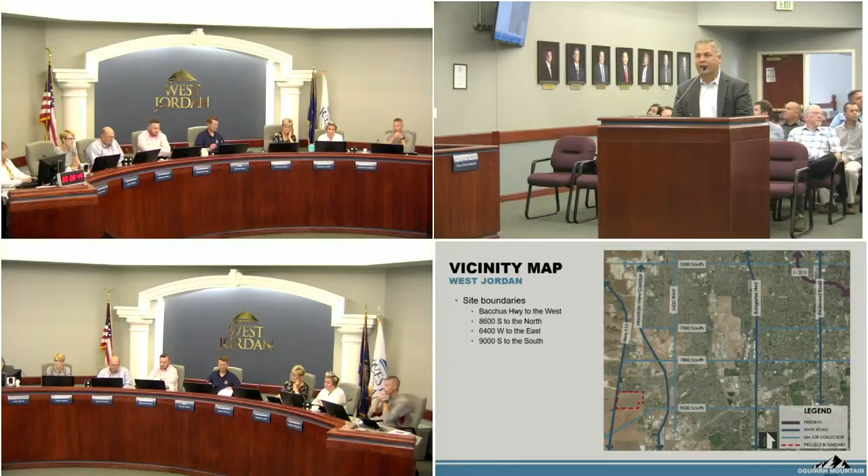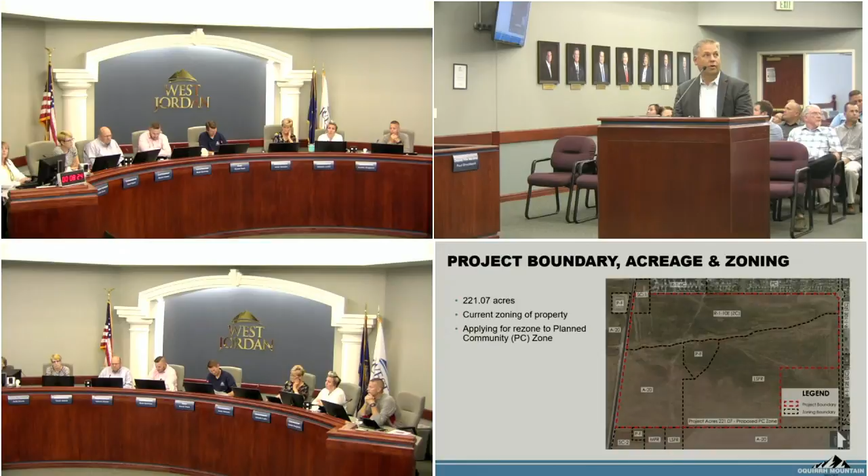As was mentioned before, the project is bounded by Highway 111 and straddles between 90th South and 86th South, just west of 64th West. The project is approximately 221.07 acres. The current zoning was A1, A20, some R1, 10E, some public facilities, and some low-density single-family residential, with a little bit of commercial ground zoned at the top northwest corner. We are asking for a planned community zone to be placed on the entire project.

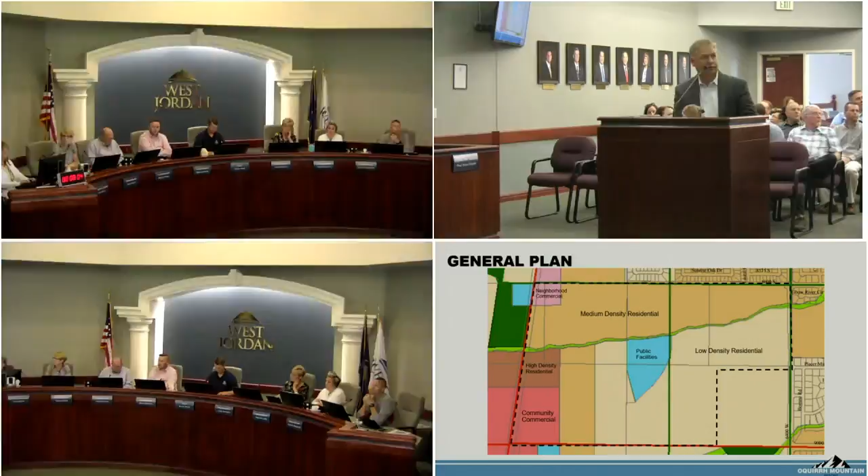This is the general plan. You can see that the general plan, is there a laser pointer here, Ray? Will they be able to see it? The general plan land use calls for some community commercial on this corner of 90th South and Highway 111, some high-density residential, some medium-density residential, a public facilities parcel here that I think was anticipated to be a school parcel, some neighborhood commercial, and then the majority would be low-density residential.

If you look at our land use, we wanted to make sure that we championed the spirit of what you wanted to do there, providing a commercial node on the corner, some pockets of very high density residential, and I'll explain what those are in a second. But the majority of the area will be a medium density blend, a blend of different size lots.

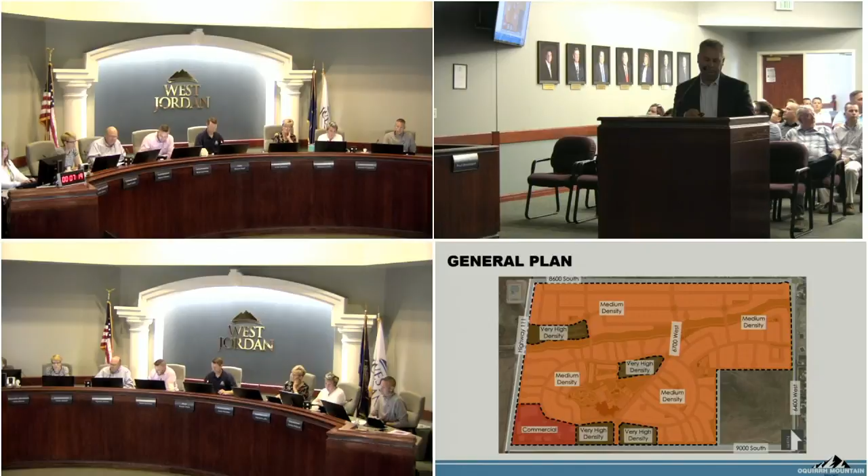We recognize that we have neighbors. We want to make sure that we're compatible and sensitive to the neighbors that have been living there for a long time. The neighborhoods to the north are a blend of 8,000 and 9,000 square foot lots. There's a piece in here that's 6,000 square foot lots, and some 5,000 square foot lots. To the east of the project, there's 10,000 square foot lots and third, quarter, and third acre lots along 64th West. Our idea was to make sure that we transition and use like for like, proposing like lots against existing development.

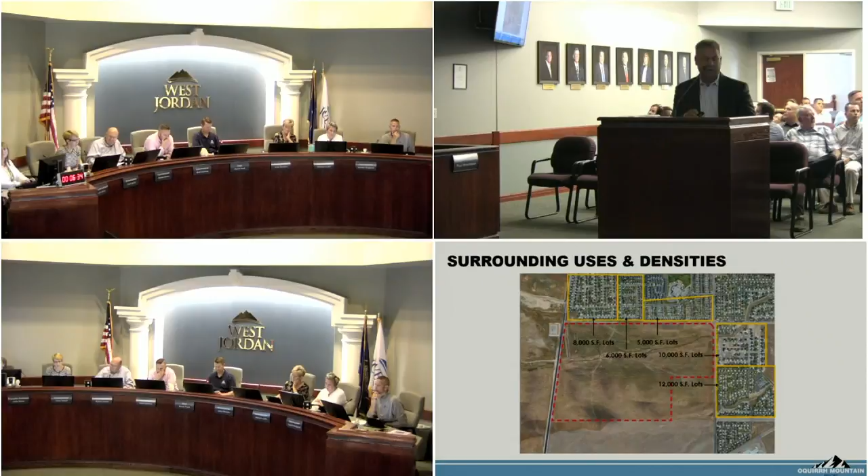The overall statistical breakdown: we're providing 30.46% of our project in open space. It's 50.35 acres. There's about 3.6 acres of 30% slope, so that slope is not counted in any of the open space. We have about 40 acres of roads.

194 acres of medium density that yields 654 units. Very high density residential is on about 17.22 acres, with 445 very high density units, and approximately 9.67 acres of commercial ground provided on the corner of Highway 111 and 90th South. We're asking for a total of 1,099 units on 221 acres, approximately 4.97 dwelling units per acre. That's our gross density.

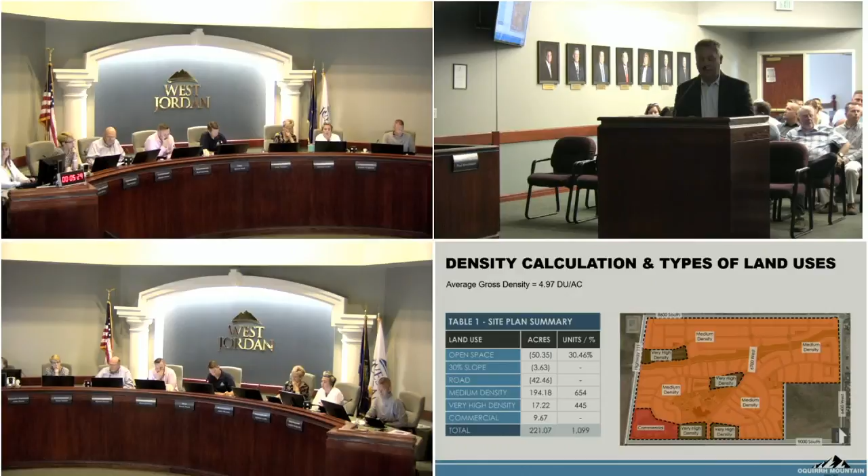I'm sure people here are concerned when we say very high density. What does that mean? This area is an active assisted living facility, so there's 85 assisted living units that are about 30 units to the acre. So it's very high density, but that's what assisted living facilities are like anyway—they're a high density development.

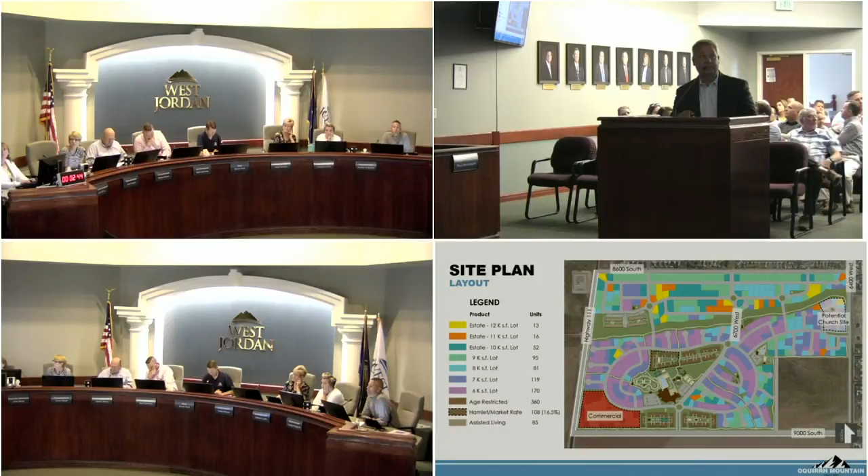Oh, one more thing—we have a potential church site right off of 64th West.

The circulation was important to make sure we're providing connectivity through the city. The city's Transportation Master Plan calls for 67th West to come through this project. We wanted to provide for that connectivity, but not creating a raceway—we want cars to get through, but not trying to set speed records from south to north. So we've implemented some roundabouts to try to calm and slow down the traffic. This will be a major collector, complying with your city standards of a 70-foot right-of-way section.

The vast majority of our streets in this project are a 50-foot street section, complying with your local street profile. We're not proposing anything different than what the city standards are. You can see there's a lot of cul-de-sacs. We have a loop road that holds the majority of the project together and encircles this major amenity, and then a series of cul-de-sacs that splay off.

We've also provided other ways to connect to a street that would abut the west side of the school property—this is a 30-acre school property. This street would also come out from the inner loop and connect back into 6400 West. We jump Barney's Wash in 3 locations, with 2 more roundabouts in this location, then tie back into 86 South.

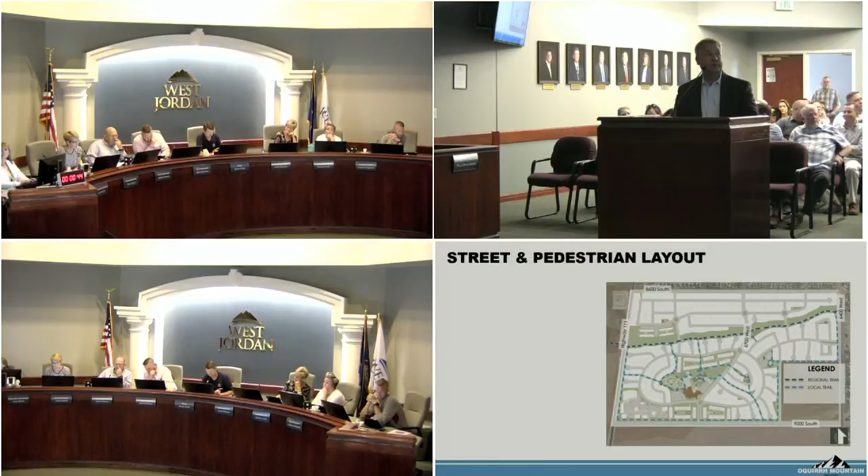Very extensive trails network that are off-street, and these trails would comply with the standards the city's established for trail corridors.

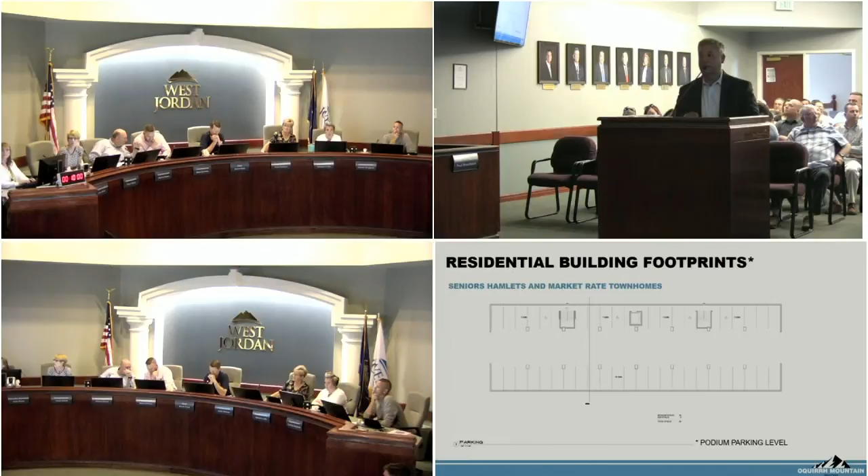So this is a schematic. This is the bottom level, this is the podium level. All of the units will be parked underneath. We'll have guest parking on the surface, but the residents themselves, because it's an age-targeted, age-restricted unit, will be able to access stair turrets in these locations, and it will be elevator fed. This is the upper level—just one level shown, but the 3 levels will be the same.

You can see here, and I know this graphic is difficult to read, but there are 3-bedroom units on the corners, and these interior units are 2-bedroom units.

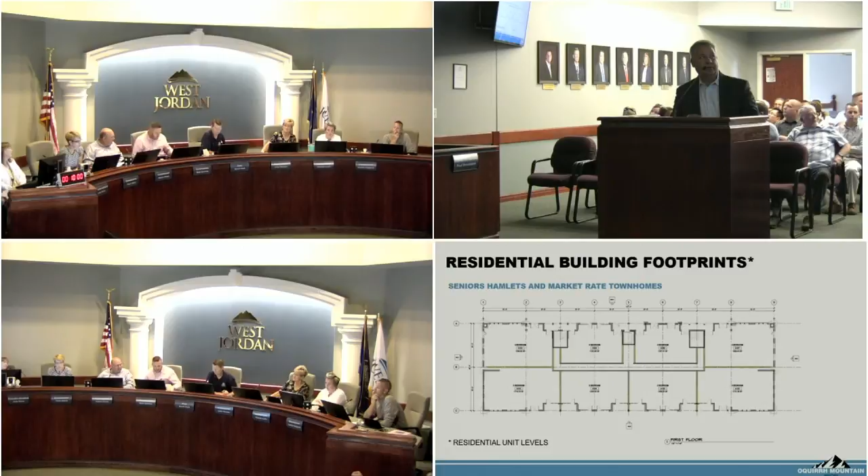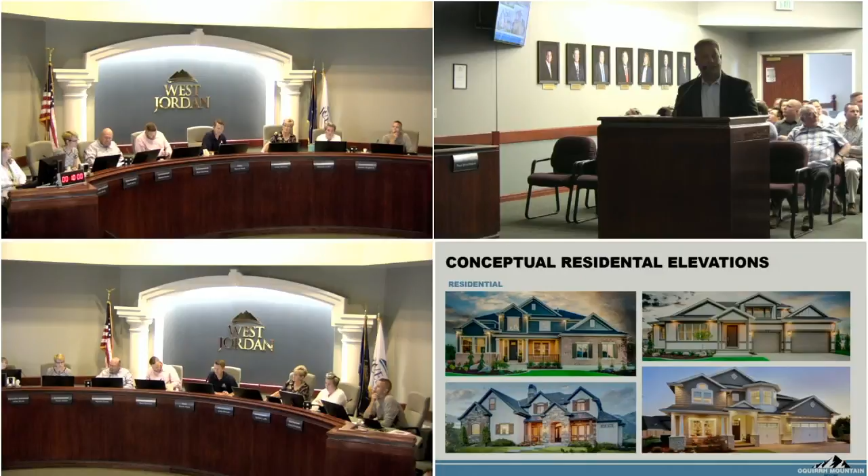Just some conceptual ideas of what the larger lots would look like. These are products that would fit on 8,000, 10,000, 12,000 square foot lots, so they'd be nice homes. These are some ideas of the architecture we are looking for on the smaller lots, between 6,000 and 8,000 square feet.

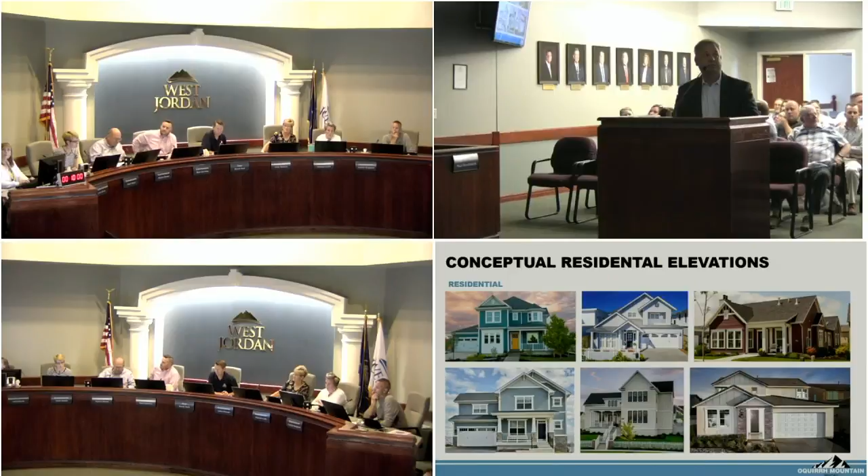Just an overview of the open space. To be quite candid with you, I've never worked with a client like this before. Usually as a planner I'm telling the client, you know, you've got to put in some open space, you really should include some amenities. This client is different. The first thing out of their mouth was: we want this to be a world-class, luxury, highly amenitized community. And I thought, okay, I started to try to test them.

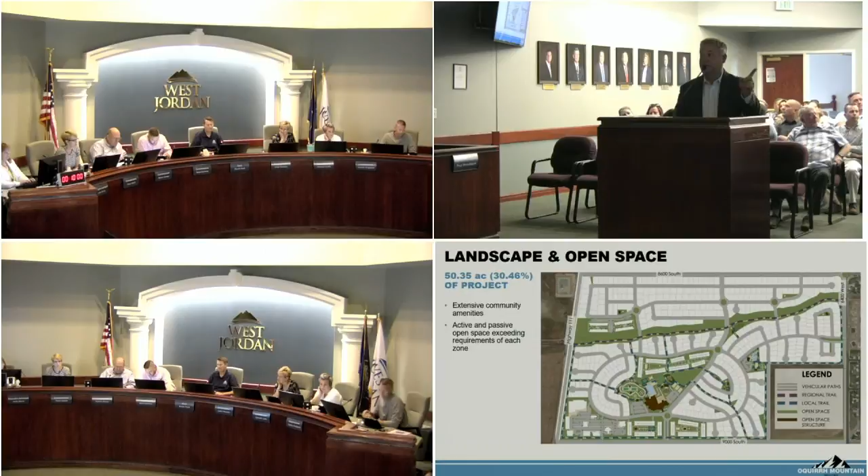So what do you mean by that? What do you want us to put in that? And I gave them a list of kind of the hot things that master plan communities are incorporating these days. And their initial response was, that's great, but we can do better than that. And they just kept adding and adding and adding. You'll see here, they're putting their money where their mouth is.

So, a very extensive trail system, a very extensive open space network. This is a list of the open space amenities: an amphitheater, arts and crafts rooms, basketball court, three bocce courts, a large clubhouse with 2 offices, a conservatory. I'm not going to go through the entire list, you have that in your document. But all of these elements find their place in this community.

Which will be maintained, installed, and managed by the HOA. The client has already contracted with the sports mall to operate the clubhouse, and it would be open to the public for a fee. They could buy a membership. When you purchase your home, you get a membership into the club.

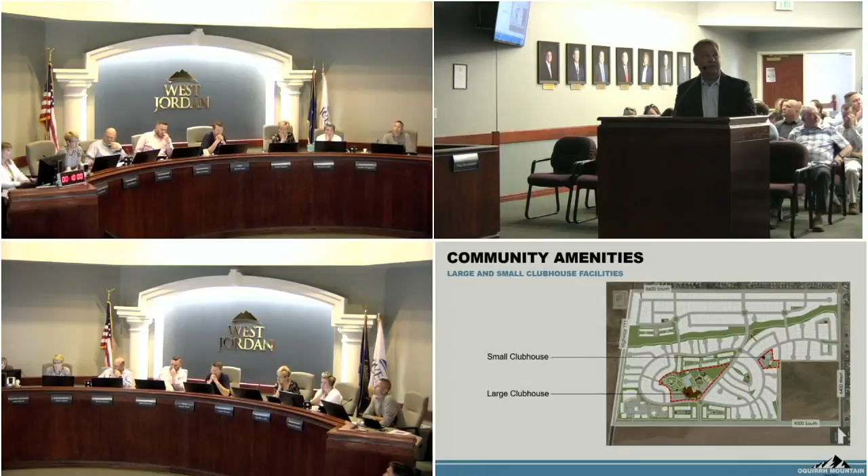So I'm just going to walk you through. There's a large clubhouse and a small clubhouse, and this is just some of the amenities around each facility. The large clubhouse is over 10,000 square feet, has an indoor and an outdoor pool. There's pickleball courts, basketball courts, and a tennis court complex here in the corner.

We've surrounded the tennis court with what they're calling an ice ribbon. I don't know if you've been out to Herriman Towne Center, they have an ice ribbon—we will have one in this project as well. There's an amphitheater, pavilions, putting greens, hammock grottos, an open play area, and parking for 200 cars.

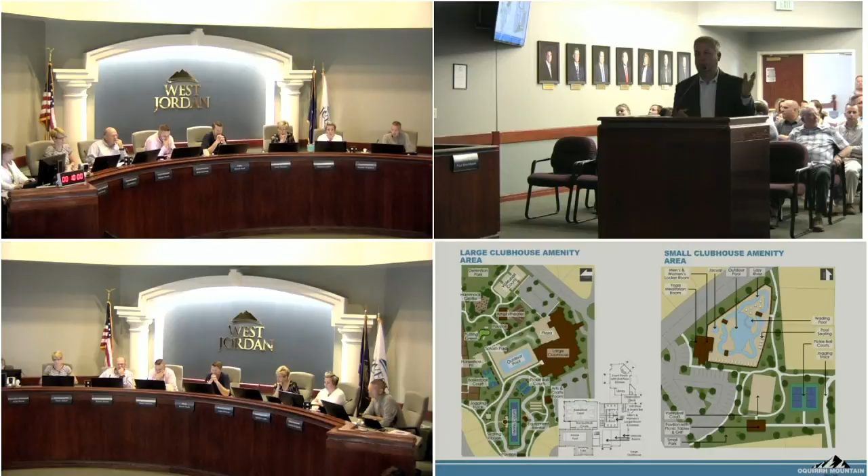This smaller clubhouse has a pool with a lazy river around it, a couple of pickleball courts, an arts and crafts building, sand volleyball courts, and small park open spaces.

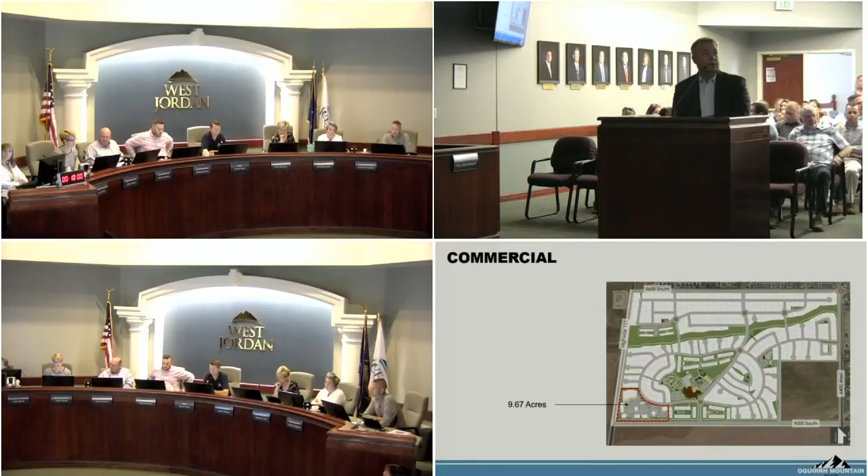Commercial—we have 9.67 acres of commercial in the corner. This is a schematic layout; nothing's been planned or set in stone. We will be working with tenants to see what their size and spatial needs are, but again, just some flavor of what the massing of this retail development might look like. It's not insignificant—it's a kind of critical part of the community.

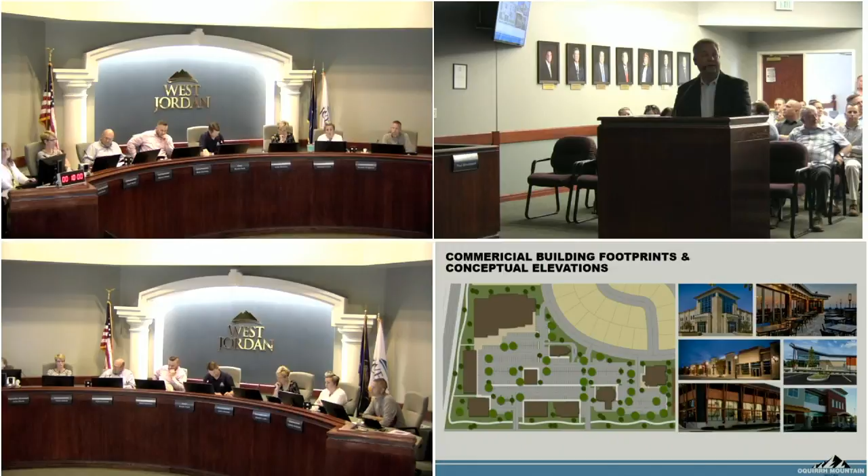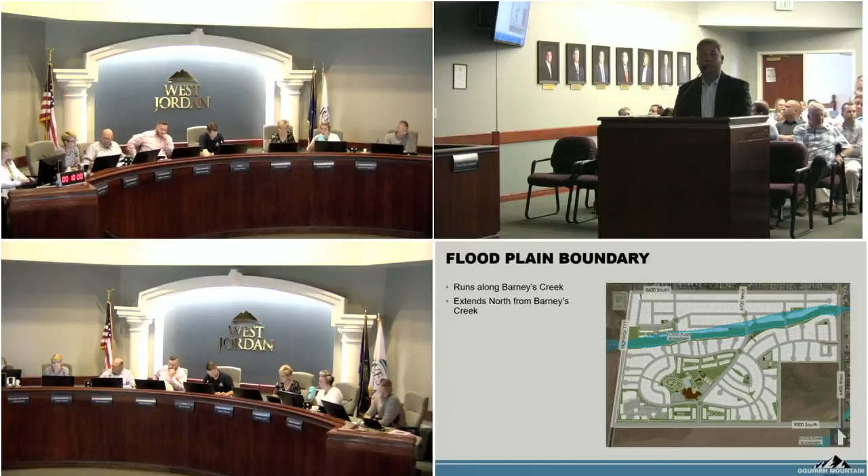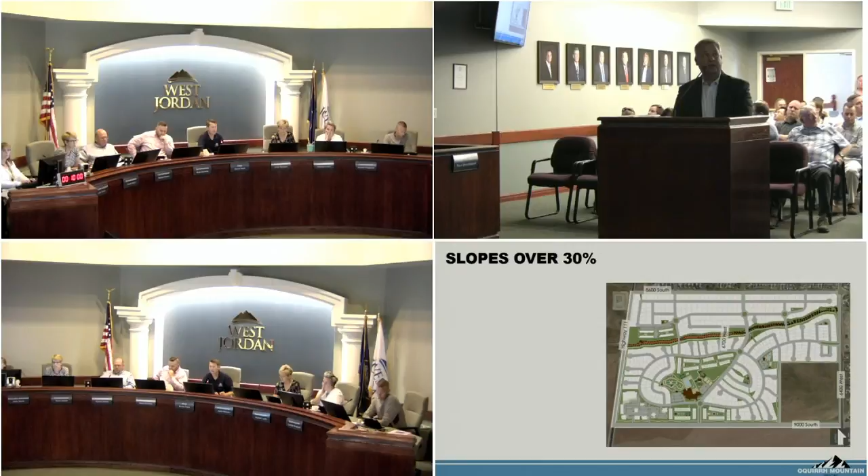We've taken into account the Barney's Creek floodplain. We're in the process of working through a LOMR with FEMA to remove that, to make that map adjustment. We wouldn't be able to build any of those houses impacted by that until that's signed off. All of the 30% slopes are associated with Barney's Creek. We won't be developing any of those. We'll be leaving those alone.

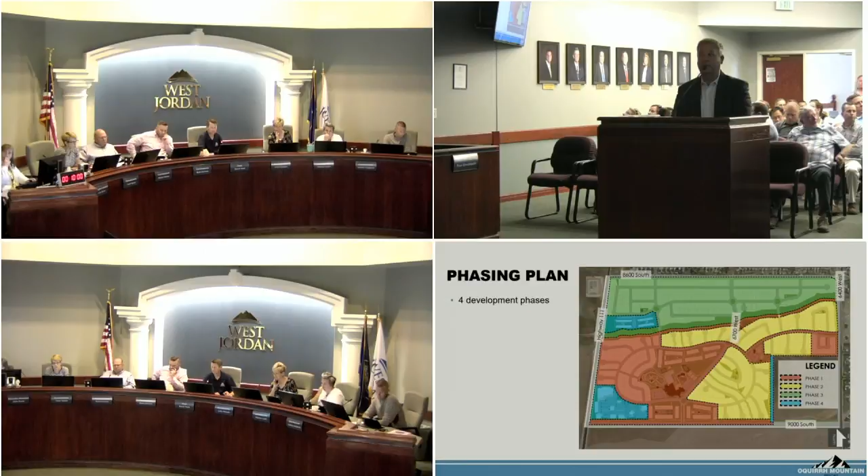That's just an initial, conceptual phasing plan. We anticipate there'll be 4 phases, and the vast majority of the amenities will come up front in the first phase.

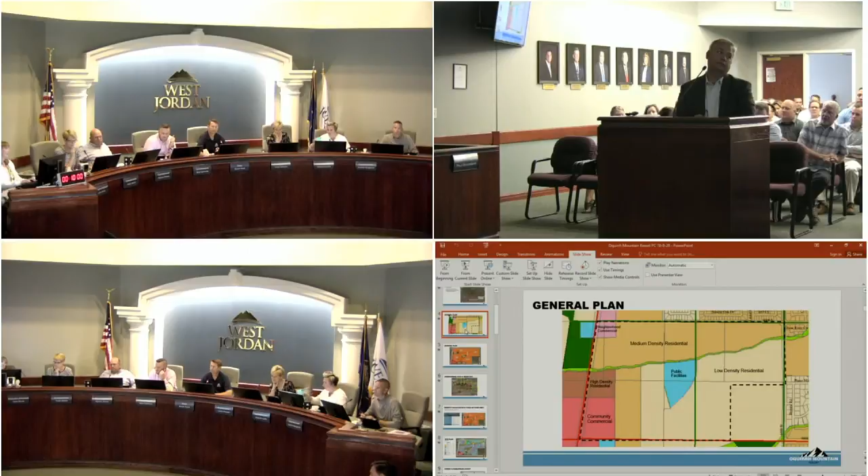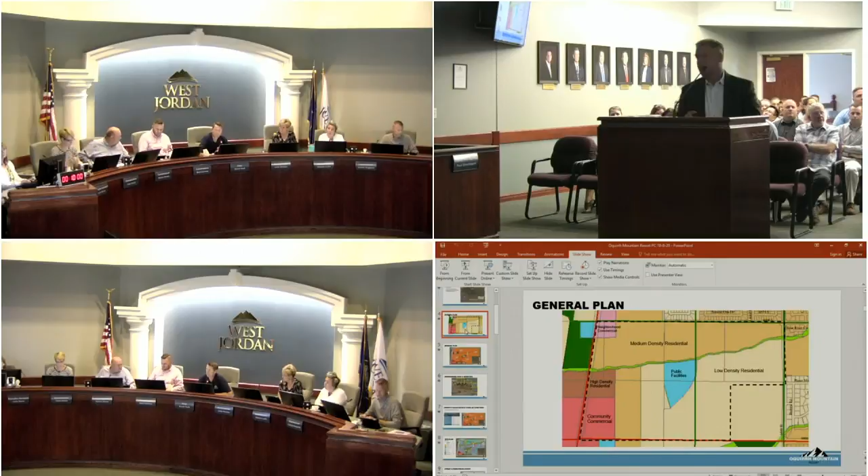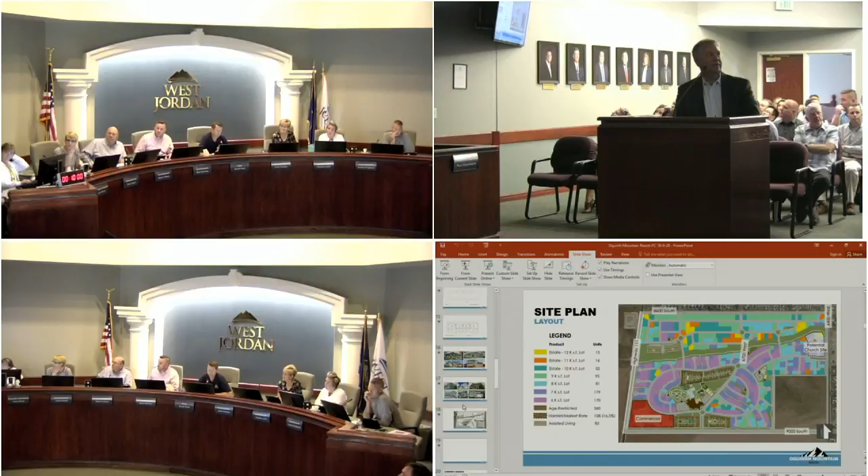So, Mr. House, just to clarify, which portion of the development is going to be age 55 and older? Can you go down, Ray? It's actually lower, Ray, it's like slide number 20. No, right above there. Sorry, slide 13, 12.

So this is the assisted living facility. This is age restricted, age restricted, age restricted. This is your market rate townhomes, right near the facility.

Great, thank you. You mentioned the amenities would be established in the first phase. What about the commercial? The commercial is in a separate phase with the assisted living facility. We're not proposing that it comes in the last phase. It's broken out separately, so if the commercial comes in immediately, we're all for it. But that's something that needs to be dictated by the market.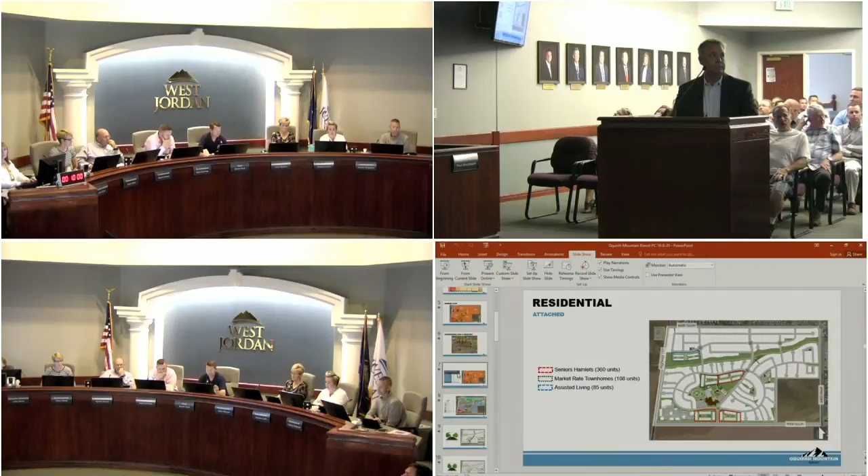Great, I think the slide would be somewhere at number 7. That shows the commercial. The only reason I mentioned it is I know we had concerns in the past of commercial ultimately falling by the wayside after the residential areas have been built out. Okay, thank you, appreciate the clarification.

Commissioner Quinn? Thank you. Two questions. First one, and I know this is really hard to predict because obviously it's market driven, but any idea what you're looking at in this commercial space? Are we looking at some kind of a grocery store or office buildings? What are we looking at?

What we've planned initially is about a 45,000 square foot box. Could be a small grocery store, and then some ancillary pads, some drive-throughs, could be bank pads, and there actually could be an office component to it as well. But again, this is so preliminary, I don't know.

But we've accommodated, using your parking ratios, for a large 50,000 square foot box, and then some ancillary buildings.

Next question, and this kind of piggybacks a little bit off what Commissioner Green said, but keeping with the spirit, in that northwest corner, currently it's zoned neighborhood commercial. I was pulling up Google Maps, looking at that area, and there's nothing there, not even gas stations. I'm just trying to figure out, is it the highest and best use to completely eliminate even that tiny little segment where we leave a gas station?

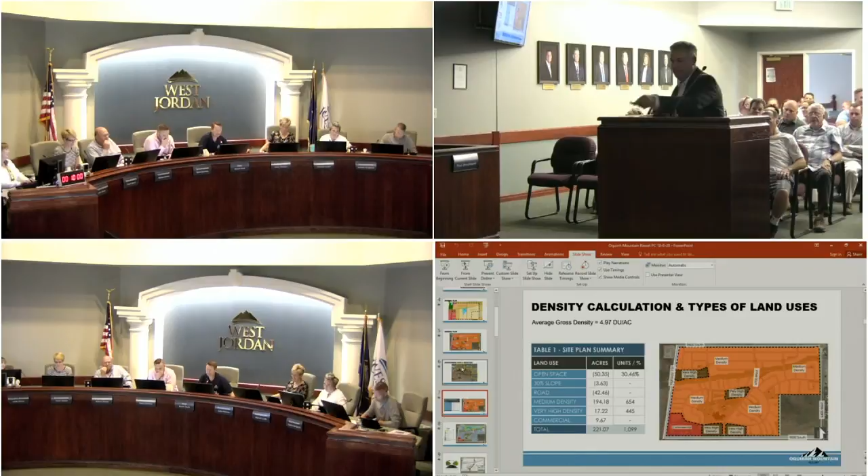Thank you. We'll reserve some time for you after the public comment section if there's anything you'd like to address. Thank you, appreciate your presentation.

Mr. McCandless, you have this item from the city. Yes, thank you, members of the planning commission, Mr. Chairman. I think Mr. Haas has done a good job of going over a lot of what I was going to talk about as part of the presentation.

We really like the open space amenities. We like how the phasing plan includes a lot of the recreational amenities up front, which has been a concern with the planning commission in the past. There are a lot of cul-de-sacs, but if you notice, they're tucked up close to where the pedestrian connections are located, close to sidewalks along Market Street. This allows pedestrians to get through to those recreational areas.

It's well thought through. We like the architecture of the buildings, the fact that parking is in more narrow units. We also like the attention given to the adjoining existing land uses surrounding this property, and how that integrates with those tenants.

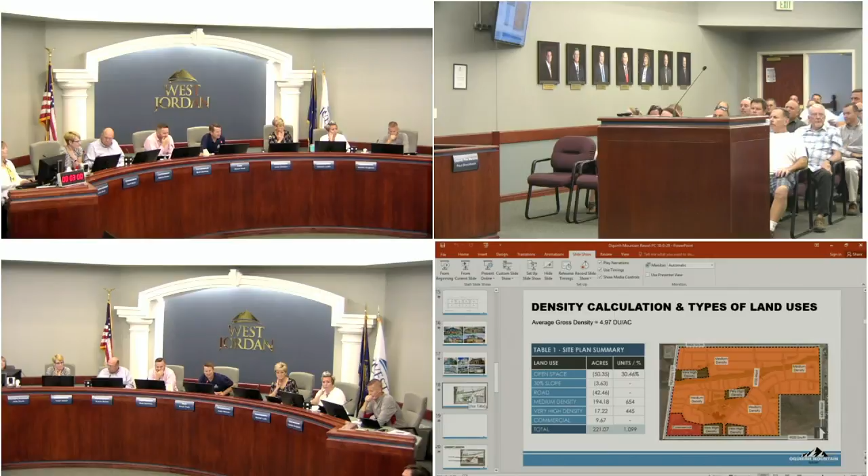My concern is connectivity to the north and into the community, the walkways. That's the basis on the south. This is just moving up the street itself, privately held, without connections through to that - there's actually a couple, one off to the left-hand side right here, then the streets here, so those are seven connection points, so that those living on the north end can get to the two facilities.

The amenities, the trails, if they wish to walk - which would you prefer? Are they just walking city streets, or is there no trail activity? Just the standard sidewalks. Okay, alright, thank you.

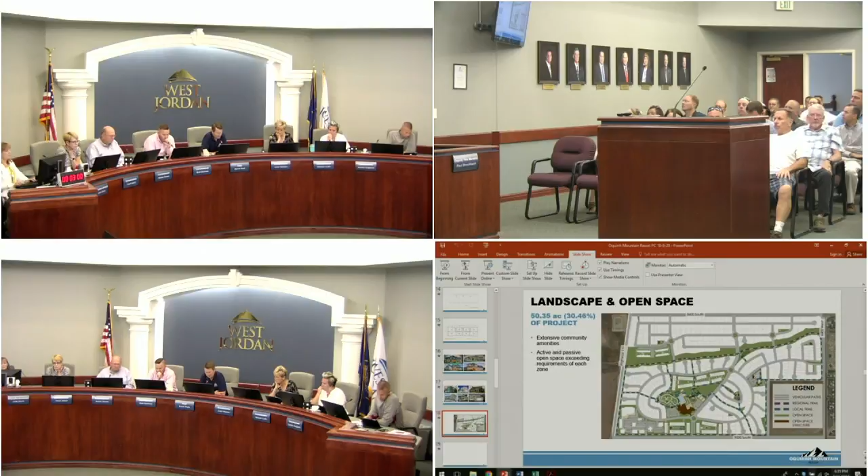Any other questions for staff? Seeing none, we'll move into the public hearing section of this meeting.

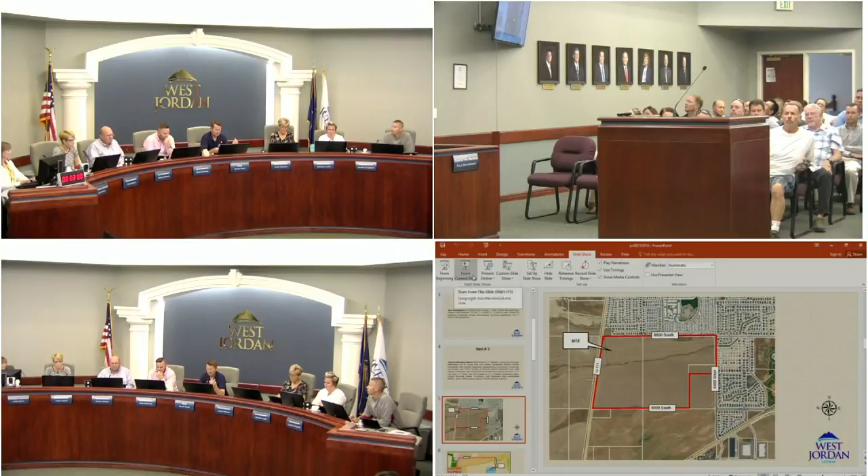One of the things that I really enjoy about serving on planning commission is always having unique perspectives up here, and being able to mention some things that the other commissioners might not otherwise think of. In a similar fashion, we recognize that citizens have unique points of view, and we want to understand your perspectives. So we want you to feel welcome to come up and speak. You'll have up to 3 minutes each. And if we could please ask, to ensure we can focus on the issues at hand but not necessarily belabor the point, please feel welcome to speak. However, if you are just reiterating what someone prior to...

Correct. So when I sit on my back deck, I'm looking out over that open field area right there, so you know where I live. Two concerns that I have: one is the traffic in that area. I've lived there for 9 years now, and over those 9 years the traffic has grown exponentially, and I see this as really exacerbating that situation quite a bit.

I would think that expanding 111 to 4 lanes all the way down to the 201 would be very important to ensure good traffic flow. Ever since they put that new Smith's out there at 78th and 56th, people from Magna and even Tooele County routinely come in on 111 to shop at that Smith's, and it's really adding a lot of congestion to the area.

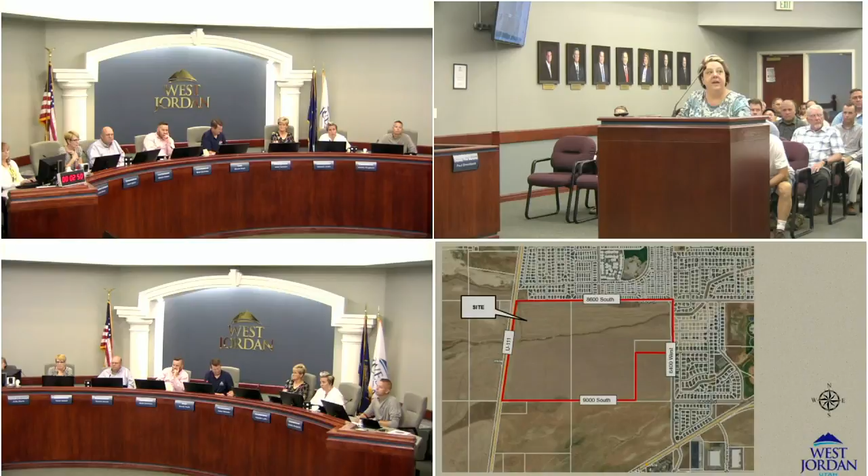Okay, my name's Valerie Pedigo. I live at 6327 West, 8755 South, straight out there at the top, about the middle is where I live. I also did my research when I elected to build a home there at Three Forks, and it is low density, and that is one of the reasons we elected to buy there.

I'm okay with this. I wasn't naive, and I don't think any of us were naive that this wasn't going to be developed. We get that, but taking it from low density to medium density, and it's the very minimum, or very close to the very minimum size lot to qualify as medium density. Putting some numbers to that today, the Olympia Hills fiasco was like 1,000 acres and 30,000 residents, which came down to about 30 to 33 residents per acre. This dials down to 23 residents per acre.

Based on that, Salt Lake County uses a 3.5 average, so that's where I got that number. But it's very close, and it's unacceptable, I think, to us.

The other thing, same as everybody else, the roadways are inadequate. It's already trafficy, you avoid 78 South and 5600 West. The schools all feed into Copper Hills, and that's already overcrowded.

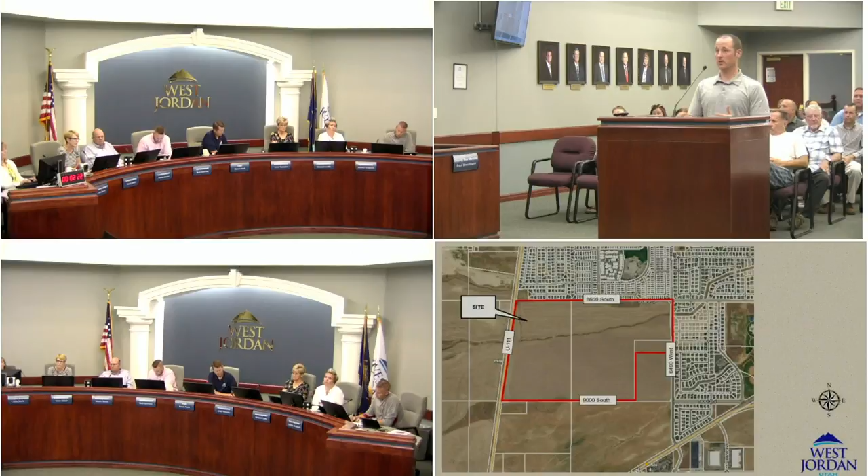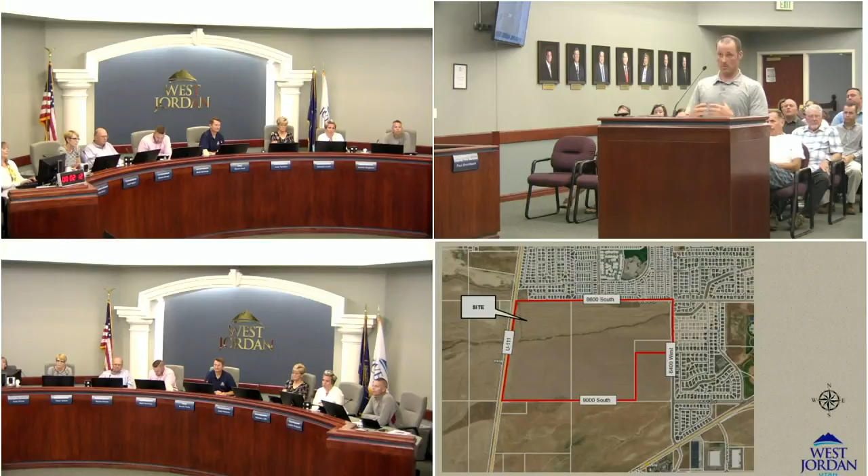Both my wife and I are concerned for the schooling needs of what the proposed plan is and the population it will bring in. Also, my understanding is that our taxes are about to go up 18% in West Jordan to fund more police, so I wouldn't be opposed to having maybe another hub of the West Jordan Police Department out in this area. I do understand and have heard other residents with issues on response time in this area. So something to consider. I don't know if it's also to consider what West Jordan can legally do to maybe have some money set aside with the individuals trying to build out here to help with building schools instead of it only being the burden of your residents and our taxes.

And that's all that I had. Anyone else this evening?

Hello, my name is Melissa Hiller. I live at 6208 Black Goose Circle.

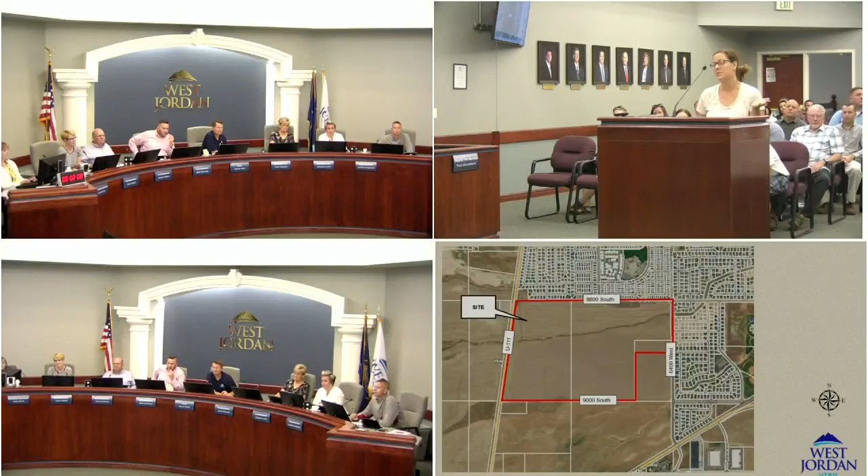Some of the other people have already talked a little bit about commercial. My concern right now as a citizen, someone that lives out there today, I find myself shopping outside of West Jordan more often than not. It's a lot easier for me to just jump on Mountain View and head down to Herriman or Riverton than it is to even get to Jordan Landing, because going anywhere east and west is just a lot harder these days than going south. So when we say there's 9 acres in this development of commercial, and that it's within walking distance for these residents, that's not a lot to walk to. There just isn't anything I would want to walk to as someone that lives there now. I just don't think the commercial is enough. It's just not enough for that area.

And I understand it's going to be developed. I appreciate you guys trying to keep it low density. I think that's where everyone's ideas are at.

The other thing I wanted to mention on that plan is, I don't know if the city still has anything in place, but I see lots of roundabouts in that plan. Please, no more. If you live out there, we're starting to turn into Daybreak. At first when I moved out there, I thought these roundabouts were so awesome, until I drove them every day. Now I think they're awful because nobody knows how to drive in a roundabout. So please don't add more in there. It's already hard enough. Thank you.

Anyone else? Come on down. Going once, going twice. We'll close the public comment section. We appreciate all of those comments. Thank you for the opinions. Thank you for your feedback. Living out in that area, we appreciate your concern.

I think it might be best if we go to the staff first before we have the applicant come back up, and let's make sure we address these items. Why don't we take them one by one here, with the most prolific one seeming to be the traffic impact, perhaps any future expansion plans for U111. Before you go to the staff.

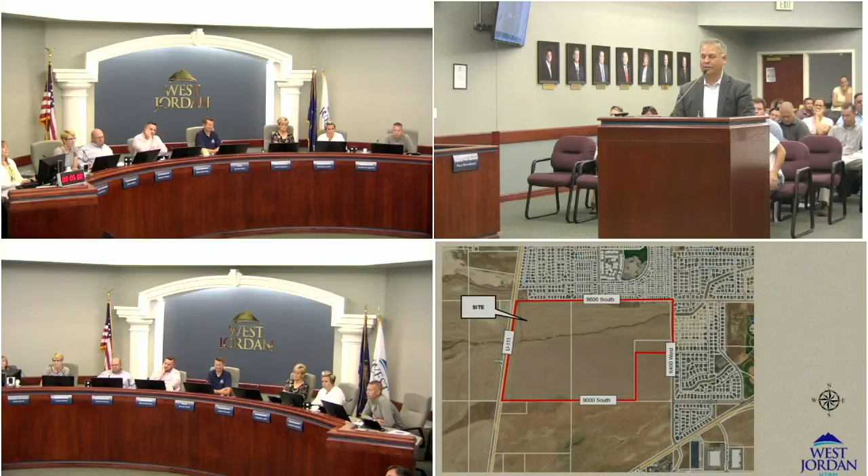So we've tried to make a really good guess at what the market wants, a good blend of different lot sizes, and a really high-quality senior development with a highly diversified amenity package. So we've done our homework. I totally appreciate the residents, and I appreciate their passion, and I'm grateful for all of their comments and all of your comments. Thank you, Mr. Hawes.

Are there any further questions for the applicant? All right, that's it. Thank you. Well, let's deliberate, commissioners.

Commissioner Gertie? All right, I'll start. As Commissioner Quinn says, we know you will, but I'll start. I'll break the ice.